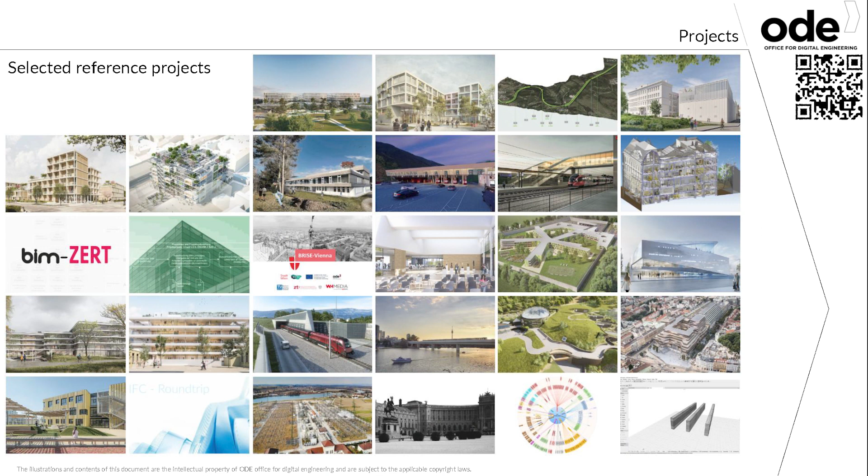Then we are also doing work for the ÖBB, Asfinag and Wiener Linien. These are the largest rail infrastructure companies in Austria. For them, we are mostly doing BIM project management, BIM development, and BIM consulting. We also consult in facility management, reorganization, and also implementation for facility management clients. These are our projects. There you have the QR code. You can scan it and maybe read more about the project on our website.

Now I come to the standardization of BIM by the client. First, we have the analyzing of data storage and system interfaces, then overall definition of objectives, why BIM, and then the definition of guidelines and standards. First, the analyzing of data storage and system interfaces. Firstly, all of those companies already have a CDE, mostly self-developed.

They have already defined for how long a file should be stored, for example, 3 years, till end of the project, or until further notice, and then the files are deleted. And they also have the user roles defined, what someone can do.

Maybe a fun fact is the hardest part is to correctly categorize the document. When you import the document onto their CDE, you get a list, and you have to write manually what this document withholds. And a lot of people have already quit the job because the people with a diploma have to do this. That's the story. Then the facility management.

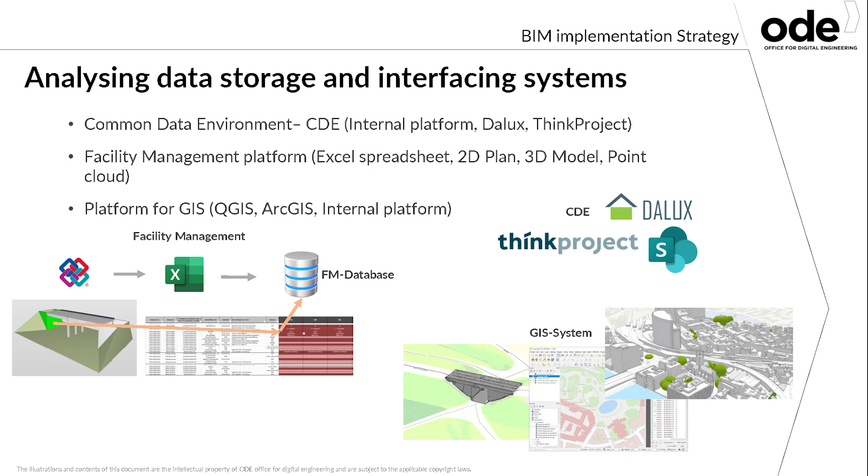Like with the common data environment, most of them have their own developed facility management. Here I made a sketch. It is an IFC file with the right data. The element has the right data, and then this data is imported or automatically connected to an Excel template and then imported into the database. This is the workflow right now, but there are already software solutions for facility management where you can import an IFC file to the plan, and it also works well.

Then the third thing is the connection to GIS. openBIM has a good connection of BIM to GIS. You can already import an IFC file into GIS software. You see here under, this is, for example, a software solution from ÖBB, the bridge down there.

And for example, Wiener Linien, they use ArcGIS Pro. But the license is payable, that's why they also use QGIS. And for QGIS, you have to make an adjustment to the IFC. You have to create a CityGML file, and then you can import it in 2D into QGIS.

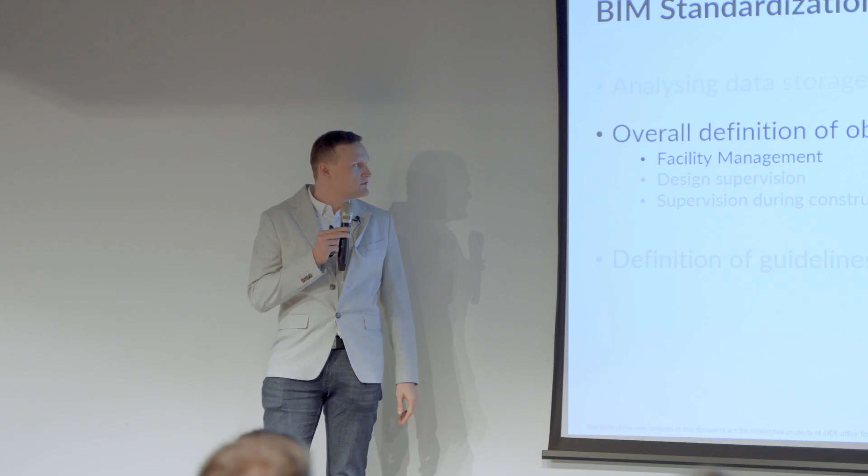Then the next thing is overall definition of objectives. In Austria, the first objective was facility management. Then the second important one was design supervision, and then supervision during construction. This is still an ongoing process; the use cases have been defined, but not a lot of projects were constructed. Here is an example from the project I'm on.

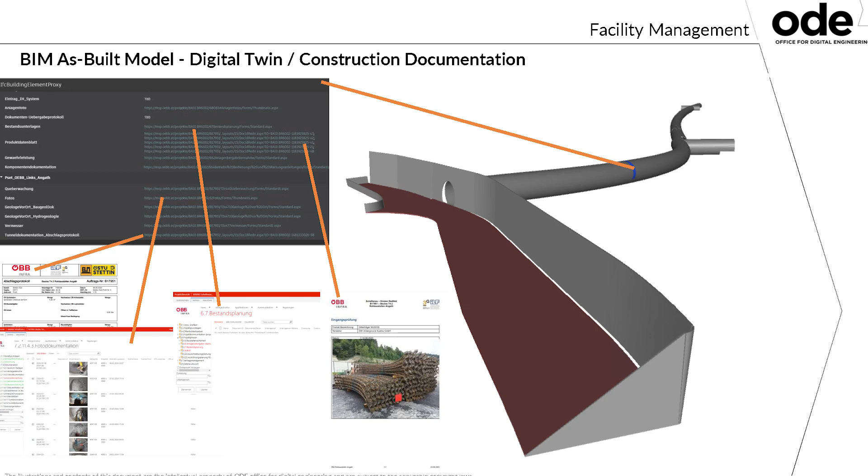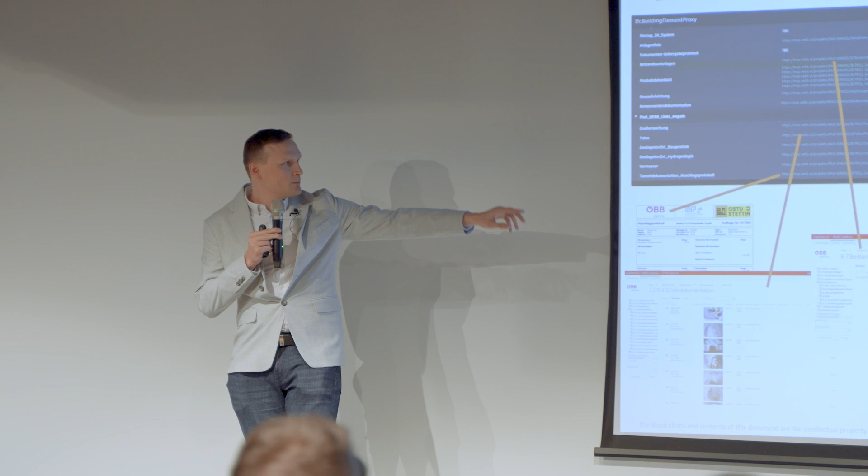This is a tunnel now being built in Angath, in Tyrol, Austria. For example, this tunnel model is a container for information. You see, they already defined the data structure and which files, which project documentation they want to connect with the model. For example, there are daily shift reports, photos, also empty files, because they will be filled when the project is finished, and then product data sheets. And this was the first use case.

Then the second use case is, for me, the most important one. This is the BIM coordination. You have to check the quality and assure the quality of the models, so that the model can also be used, for example, for facility management or 5D.

And this works like this. Most companies have the solution Solibri. They have also predefined rules. You import a model into Solibri, execute the checking, and get a report. You can communicate with the planner via model-based BCF, and with the client via PDF or a Power BI report.

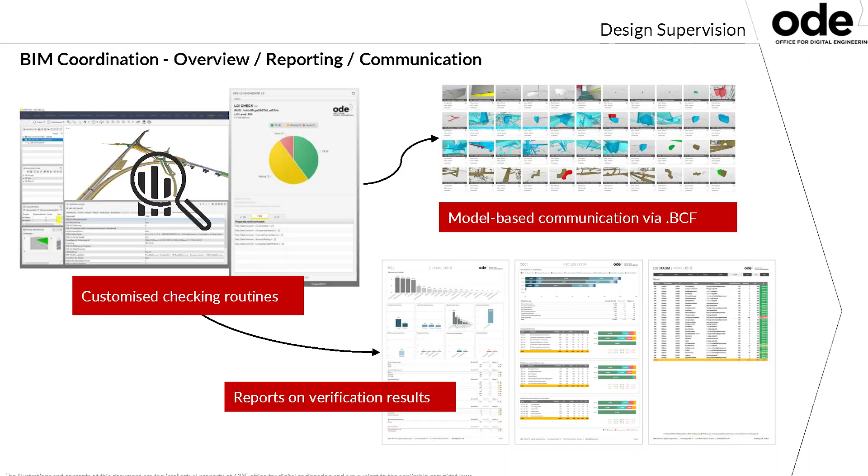And this is really good, the proofing tools, because every 3 days before the BIM coordination we get those models, and then we have 3 days to check the models, and it works. Even for the largest projects, we have enough time to check the model detailing.

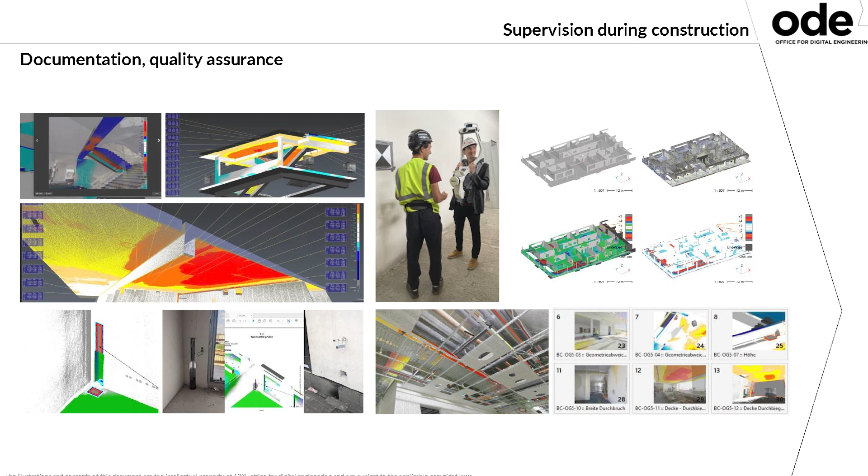Then the use case: supervision during construction, documentation, quality assurance. This was one school in Vienna under construction. We compared the model to what was actually constructed on site using point cloud scans. For concrete works, scans were done every month and the model was adjusted, which was a good approach. But for installations, pipe compartments close too fast - every day or every week - and we only scanned once per week, so a lot of data was lost. It was not good practice and won't be used again.

Then the definition of guidelines and standards. The most important document in Austria is the Employer Information Requirements. This document is an attachment to the classic project documentation, and its chapters are mostly about how the client wants BIM implemented in their project.

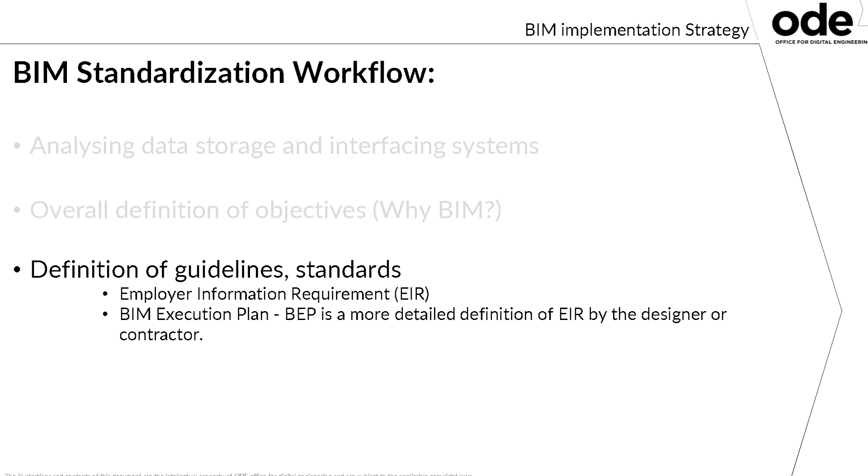Then the BIM Execution Plan is a more detailed definition of the employer's information requirements from the designer and contractor. Also, a good thing is the database BIMQ - almost all clients have this database. This is a database for attributes and properties.

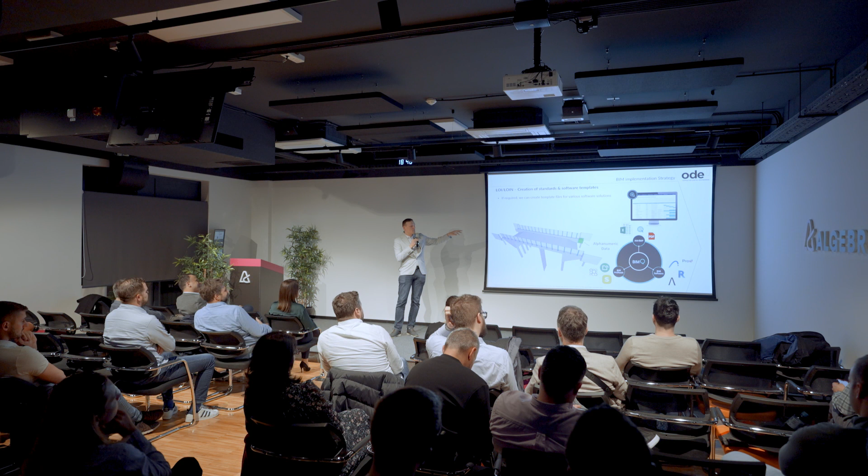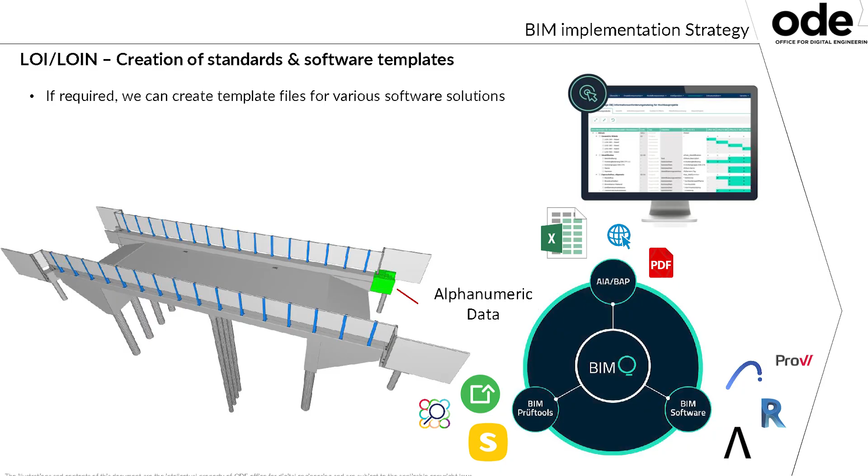For example, you have a wall. In this database are defined all the attributes for the wall. You choose the right use cases and get the right properties for this project. Then you can export a template of these properties and import it into, for example, Revit. You can also export a proofing tool and import it into Solibri, then self-check if your model has the correct data.

And yeah, this was how the implementation of BIM is working, or was done, in Austria. Now I'll go to the project we are most proud of, that we were part of, and this is BRISE - a semi-automatic review for the build permit.

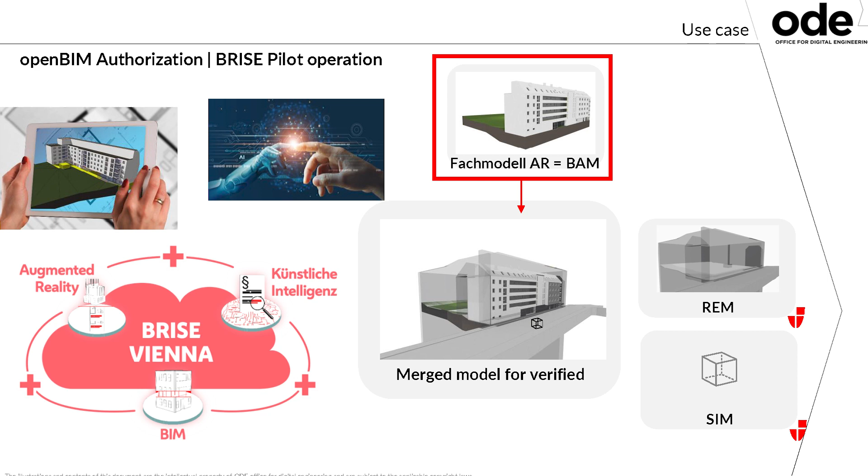Why a semi-automatic review? Vienna has more than 13,000 applications per year. The applications are growing every year, and their complexity is also growing. We developed three models: first the architecture model, then the boundary line or parcel line model, and then the system information model - the model for what is on the parcel, what can be built there, and so on.

How AI was implemented in this project: documents were uploaded and it classified the documents. It also went into the documents and classified the text, because many were handwritten, searching for and digitalizing the text. Then augmented reality was integrated - the architecture model was placed in real space using various apps, also on phones, and a notification was sent to the reference and to neighbors so they could see how this building is colliding with them and so on.

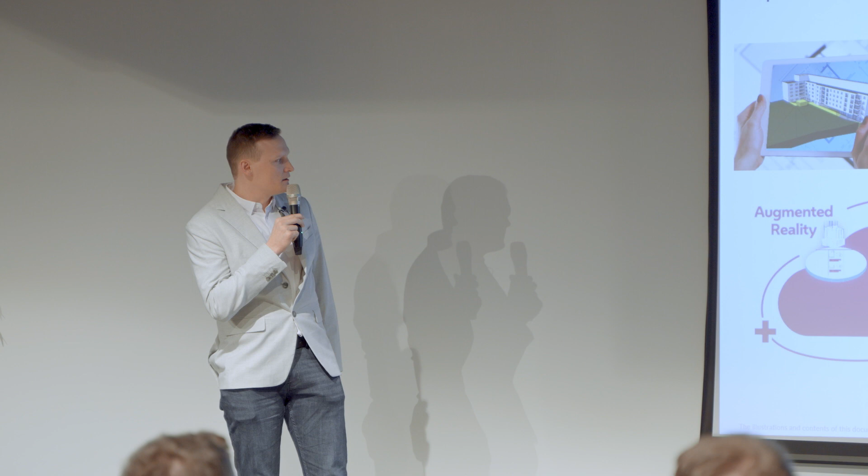And then how BIM was implemented - this was our part from ODE. We developed and programmed over 3,000 checking rules for this project, and it works like this.

You have a BIM model - the designer creates a model and uploads it onto a web page. Then the check is executed, and the planner sees how far he is from getting the permit, until he gets a good model, and he can do this the whole time until his model is okay. Here are examples of rules: natural lighting rules, escape route analysis, and classification of static elements.

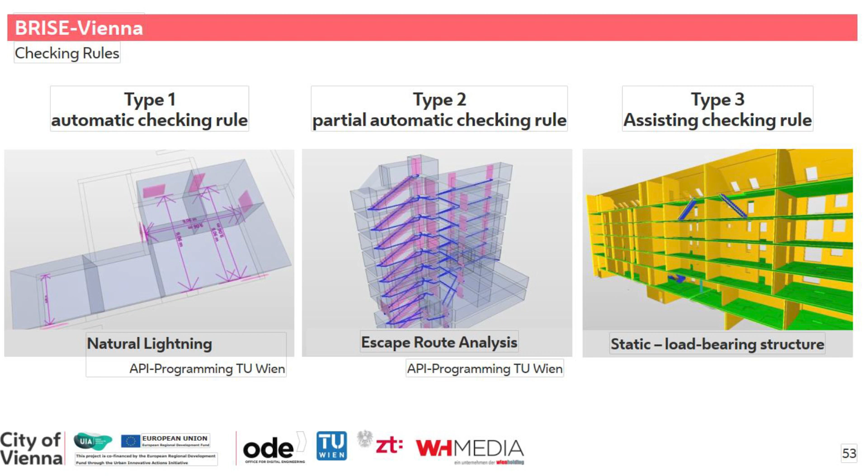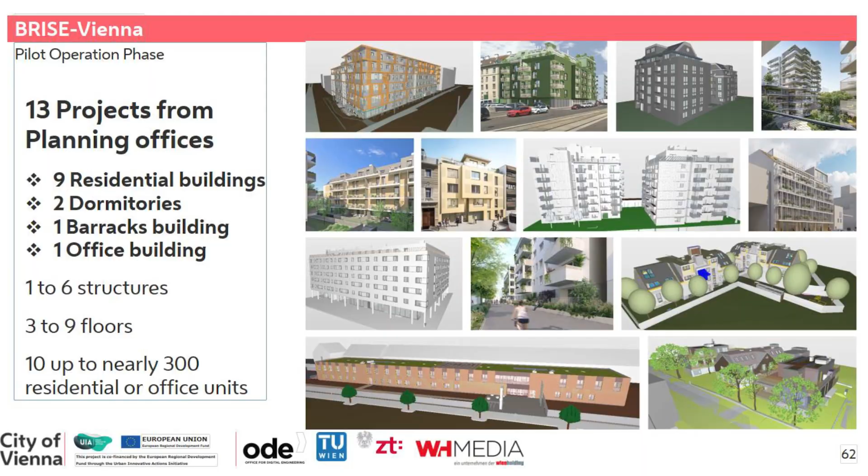And here are those 13 pilot projects in this project. The pilot project phase finished last year, and in 2025 the next phase will begin. There are already 2 projects, but now it's already possible in Vienna to apply for a build permit with a model - but sadly you still have to create the classic project documentation.

But will models be transferred for facility management further once you finish the project? I don't know, because this is just for the build permit, and I don't know who is the owner of the models, but surely when the models are okay, then they would use it for facility management. And this is it. Thank you.